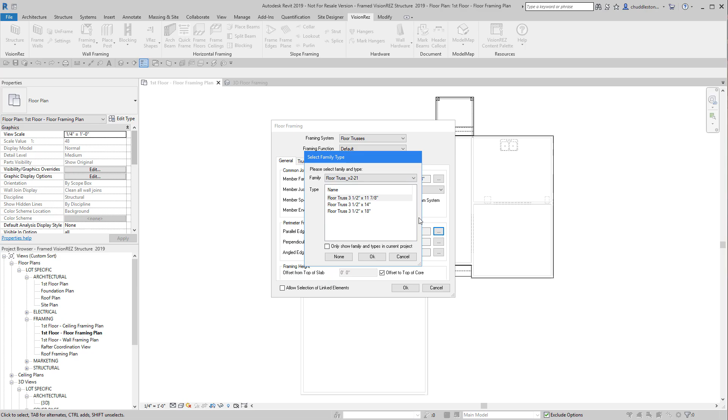We're not going to have a beam system, and we're going to have disallow joins, so none of those members will join with one another. I'm going to have a parallel edge family, which is going to be the same material that I'm using. So we'll put a floor truss 11 7/8 and say OK.

I'm going to offset from core, so it's going to be a 3/4 inch drop down because of the sheathing that we're going to have inside there. So I'm going to say OK, pick my floor system, and say finish.

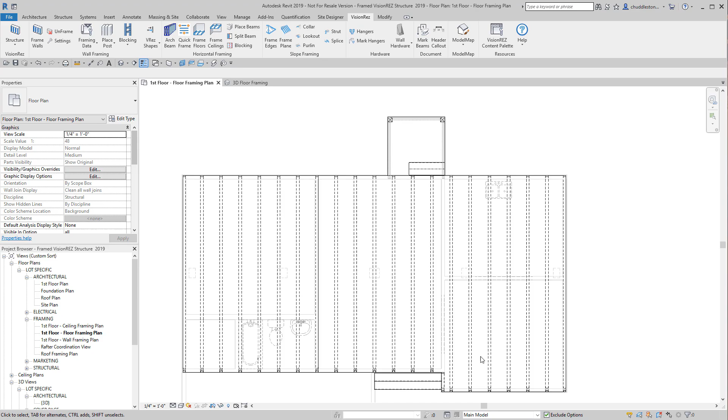It populates the trusses inside there for me, and it gets them in the right location. If we were to take a look at this beam system that we just placed in 3D, this is what we'll have. So you can tell that we have our beam system in there. I have the floor system at a transparency level of 80%, so we can see right through there. There's a 3/4 inch gap here for our floor decking.

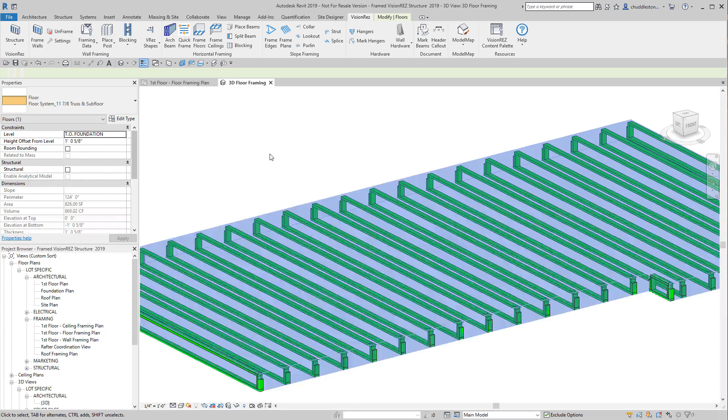So get that back into view, and we're going to switch back over to our plan. There's a couple things we need to add. We need to split some beams, and then we need to add a beam system that goes below that's going to hold or carry most of these, and then we need to add blocking.

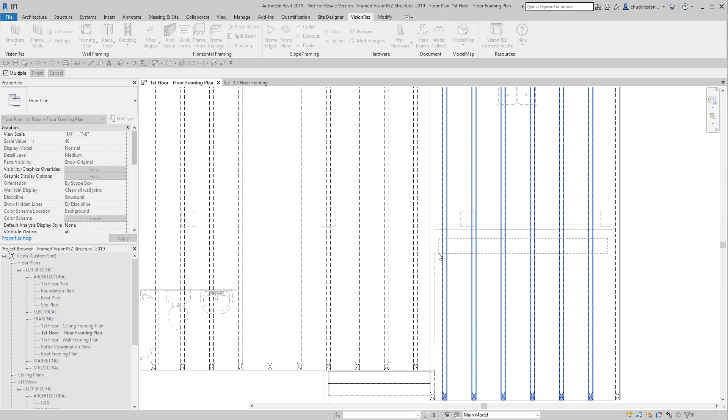So the first step we're going to do is split beam. We're going to split the beams on this end that are extra long. So I pick the tool, say finish, and it gives me a couple of different options of how I want to do this. I want just to make a square cut.

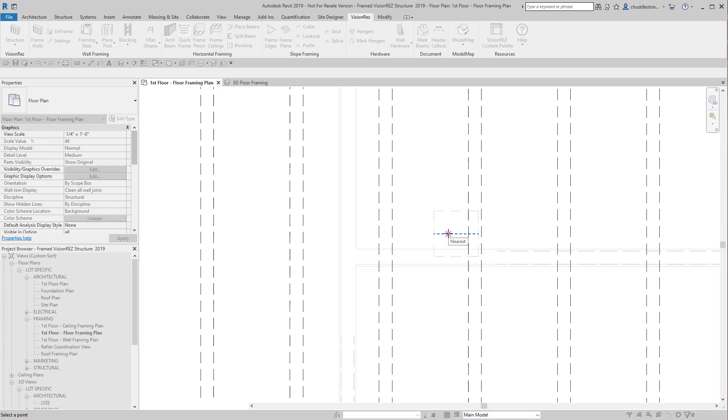I want them to sit directly on top of a beam system that I'm going to add next. So the gap I want to have is just 0 inches. So I'm going to say OK. I'm going to pick the center of this column, and then it splits them.

Now what I need to do next is add a beam. So I'm going to do place beams. So I want to be dropped all the way to the bottom there. And yet you did notice that when you do change these, it shows you exactly where you want to be. So that's where I want to be, at the very bottom.

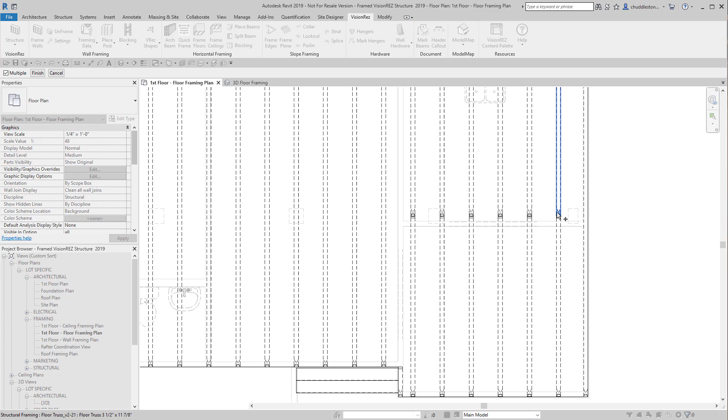And I'm going ahead and select everything that I want to carry. Say finish. And then I need to pick over here which one I want. So I want a 3-ply 2x12 multi-ply beam. I'm going to start in the middle of this one and go to the end. And there's my beam.

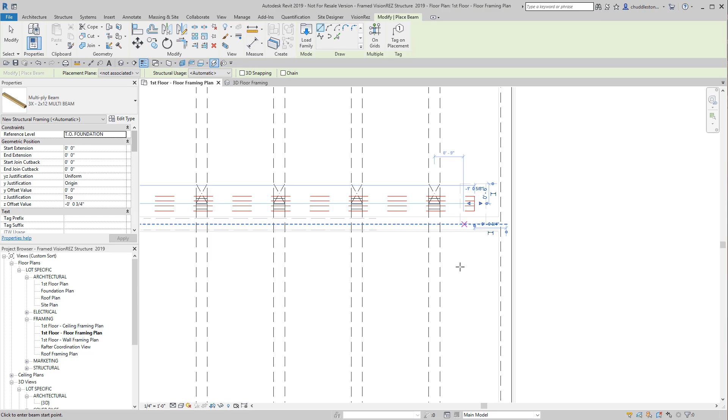If we were to take a look at that in 3D, give you a little bit better idea what's going on there. Everything's just resting on top of that.

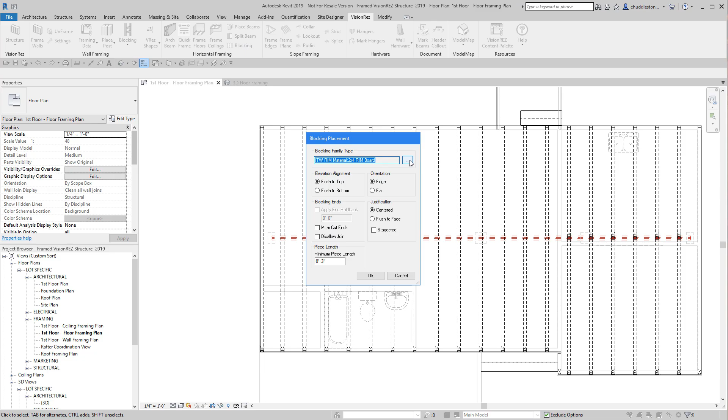So switch back to our floor plan. This is where we're going to add our blocking. So we'll go ahead and say blocking. And we need to pick the same material that we used. So I'm going to use another truss material. Floor truss, same size. Say OK.

And I want it to be flush to top. And I do want it to be on edge. No holdbacks. Justification can be the center. That's fine. And minimum length piece can be up to 3 inches. I don't want anything less than 3 inches. So I'm going to say OK.

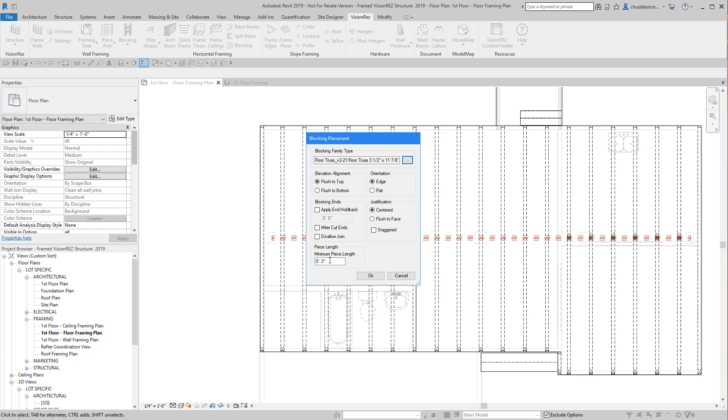Pick the trusses that I want it to be carried with. I have to say finish. Then I can pick the wall, and it adds the blocking automatically for me.

On this end piece, I can add an additional piece here. All I have to do is just copy it over. So I'm going to pick the piece and type CO. I'm going to move it over 2 foot.

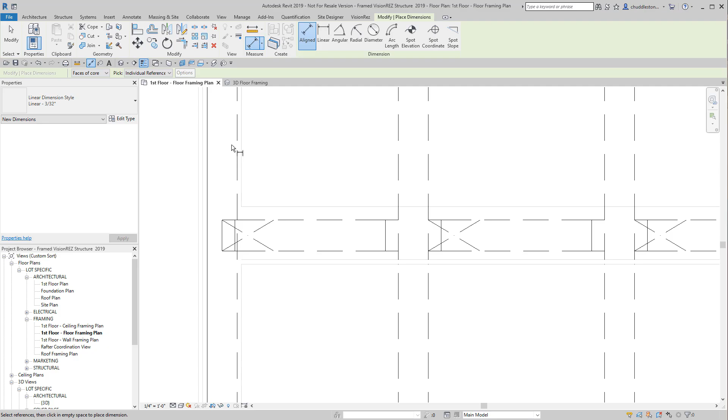Then I'm going to take a look at my distance. So from inside to inside, I'm 1 foot 6 3/4. So I'm just going to pick that truss and change this number to 1 foot 6 3/4. After I've changed my size, I'm going to go ahead and just move it over with the tab button, gets it in there, delete the dimension I added, then we can take a look in 3D, and that's our floor system.